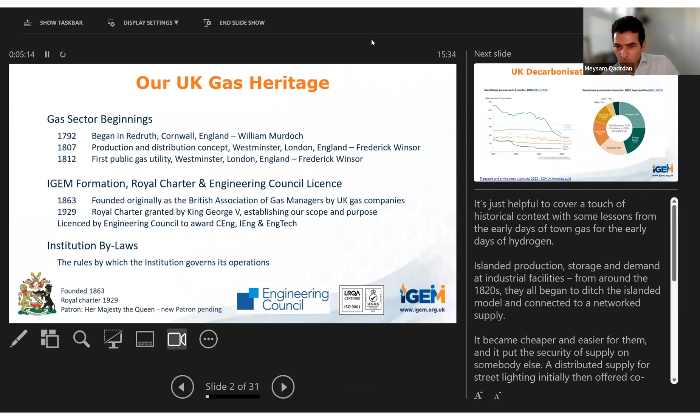Hopefully the slides will transition. There we go, excellent. I can see your notes. Oh, can you really? Do excuse me, I don't really need the notes, I can get rid of those somehow. Let me just try shutting my laptop. If you switch your screen, that should solve the problem. Let me reshare. I'm afraid that's the same. If you go up to the top there, it says display settings, click on that drop down, maybe presenter mode. It won't let me do either of those. Right, I've ended the slideshow, let me start again - that might be a bit more helpful. Try this. There we are, perfect, okay. Apologies - no, I don't really need the notes anyway.

So it's quite helpful to have a bit of UK gas heritage as an introduction, for some lessons learned from the past. In 1792, which is a long time ago, the gas industry kind of started in earnest, when gas was produced from coal to light a house and to provide gas for a torch and so on. That became something that Boulton and Watt offered to industry, to build gasworks sites for islanded production and supply for industrial facilities.

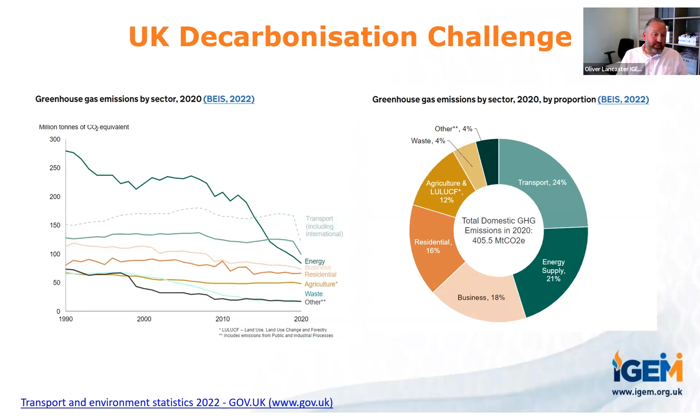One issue for the gas system is it just carries on quietly delivering and hasn't really had much of a front seat in the energy debate for quite a long time. It kind of only just woke up to it really in, say, 2014-15, when biomethane sites were starting to be connected, bringing renewable natural gas from wastes and residues.

Just helpful to go over a couple of points here, in that, as I mentioned before, it's old. It's been delivering for 211 years. In fact, I know an asset that's, I think, 201, 202 years old that's still operational. Around about a third of all energy consumption is for heat demand that's provided through this system.

Although it says there 80% of demand met by gas at peak times, it can be above that, towards 90%. And about 85% of UK homes are connected to the gas grid for their heating and use for cooking as well, so that's about 23 million in total.

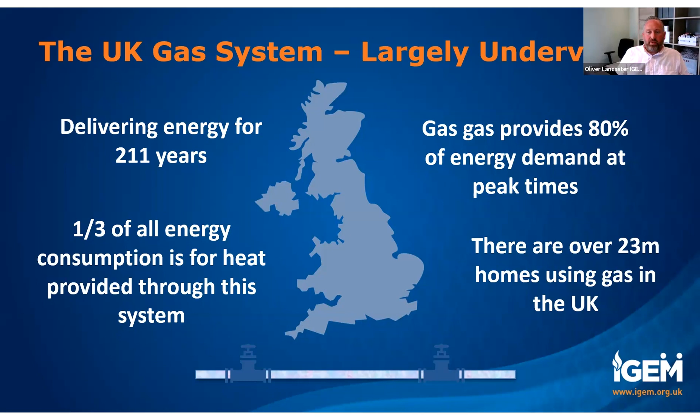There's a lot of pipe length involved all over the UK. And the government has been working on the options, the potential there is for displacing, repurposing the gas system so that it doesn't transport fossil gas anymore, but transports hydrogen instead, with different appliances that can be used to use that hydrogen if we don't use natural gas instead.

One thing that certainly goes overlooked is the storage capacity of the gas system. There's actually storage capacity in line pack. There might be some local storage, beach storage as well, but the inherent storage of the system that's relied upon includes the geological structures, anticlines, that the natural gas is coming from. That inherent storage is relied upon, and to replace all of that storage so it wasn't coming from gas at all is equivalent to about 21 billion Tesla Powerwalls, which is quite a substantial number, of course.

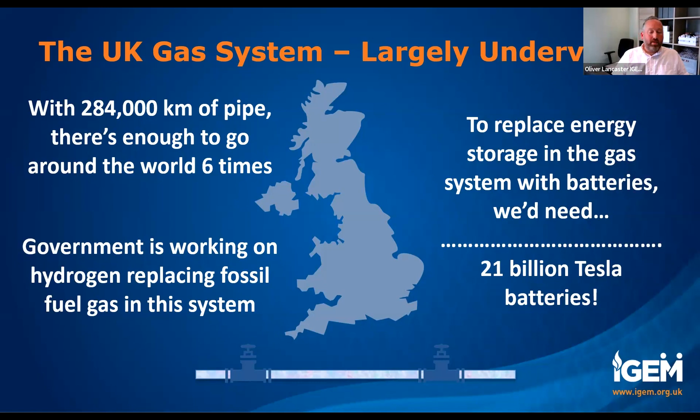But the storage capacity and the value of storage, and the low cost of that storage that we use all the time, is not really appreciated.

Part of the net zero energy system challenge, as far as I can pick up, is that there's a low awareness of system dynamics. That's not just across members of the public or people putting narrative and commentary out there in the media. There's actually, I think, across the whole group of people who work in the energy system, a low awareness of energy system dynamics. And part of all this problem is that there's a divided lobby on what we should do in the future.

There's deeply held opinion that maybe face saving, or a particular view that's been held for a long time. Or it could be that there's a business or investment connection to one part of it. Unfortunately, quite a lot of the time there are assumptions made about things people don't know, and there's maybe a blinkering and focus on just one small corner of the energy system that someone might be an expert in. I'm not saying I am by any stretch, but it's a huge system, it's very dynamic, and we need to overall get a better grip of it.

It's all around electricity generation, electricity consumption, and the networks that get it from A to B, and gas as well, powering industry - so all the industry producing products and employing people. It's fueling transport, and there's obviously some change going on with that at the moment, and it's heating buildings.

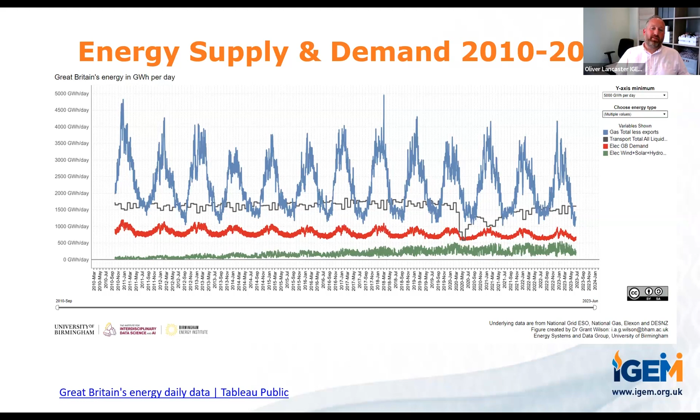Although the year-on-year amount of gas used in power generation in the UK has come down a little bit, the reliance on the gas system for power generation as a flexibility enabler of renewables has grown. At the moment, on a 5-minute by 5-minute basis, electricity from gas could be anything between 7% at its very lowest to keep the grid stable, right up to over 70% of electricity generation from gas. It's just working with the demand level and the availability of intermittent renewables at the time.

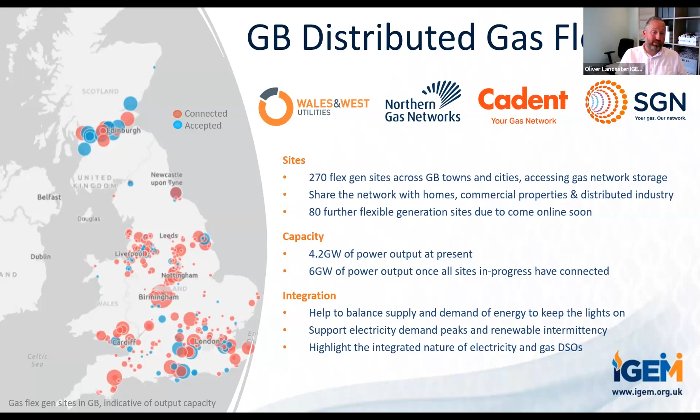That's power generation. When it comes to industry, there's a mixture of possibilities around electrification and fuel switching to things like hydrogen. This is an example of one particular industrial facility that will be using both of those.

This is a steelworks in Cardiff Docks in South Wales that doesn't make virgin steel, so it doesn't have the blast furnaces and coking plant that we have down the road in Port Talbot. This is recycled steel, so the steel comes in to be recycled, gets melted down with an electric arc furnace, and then there are currently natural gas mills for dealing with the recycled steel, turning it into base products. They're well on the way of planning the route to change over from natural gas to hydrogen, and we've actually partnered with them as IGEM on that for the safety skills and standards associated with the private network of hydrogen supplied to those uses.

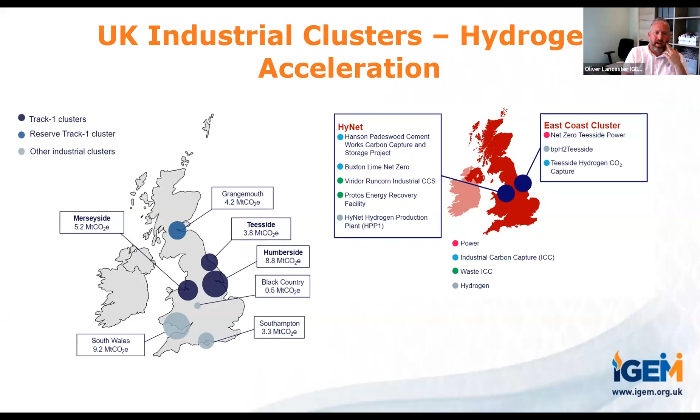This is an example of a cluster that's already got all these organizations waiting for a supply of low carbon hydrogen, largely blue hydrogen made from natural gas with CCS, but also green hydrogen supply in there as well. Importantly there's the connection of all the industrial clusters with transmission infrastructure, shown in the thick green line. This co-benefit is quite important - although it's only a small area of GB in those red areas around these major industrial clusters, there's over 40% of domestic heat connected to the gas networks and 40% of HGV registrations in those areas. So you can see a minimum viable product appearing here for pushing hydrogen into the economy.

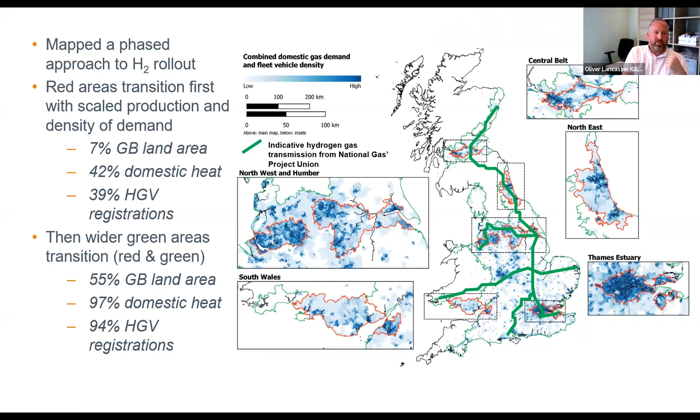Lots of work has gone into the conversion of cities. This is an example of Cardiff, done a few years ago, showing how it was segmented over 3 years and then sub-segmented, but lots more work will be happening on top of this. Just to give you an example of the detail at the local level of what's been going on.

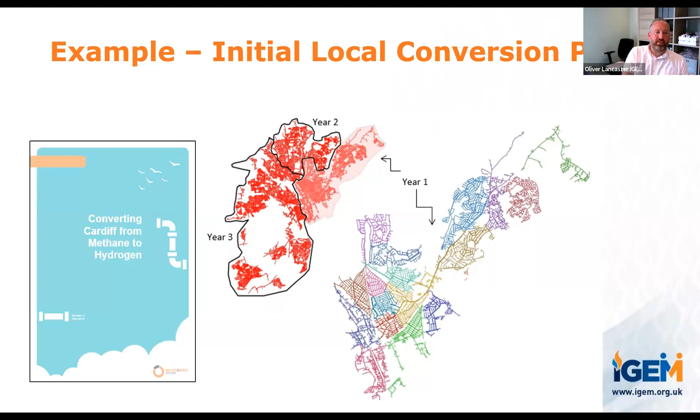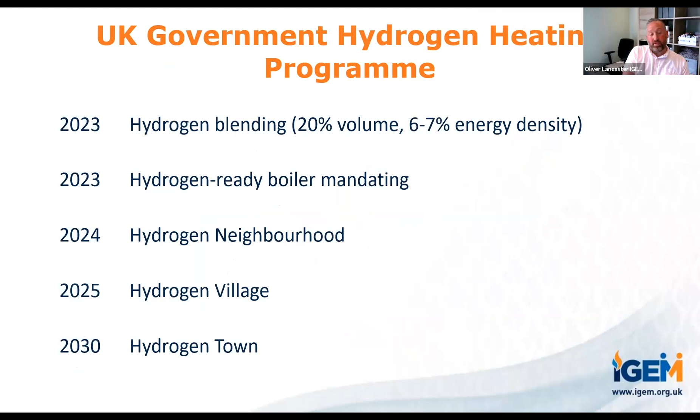Government have a lot of decisions to make - hydrogen blending and hydrogen-ready boilers being mandated, decisions to come by the end of this year. Then the delivery of the major trials: hydrogen neighbourhood, hydrogen village, and getting to a hydrogen town in 2030.

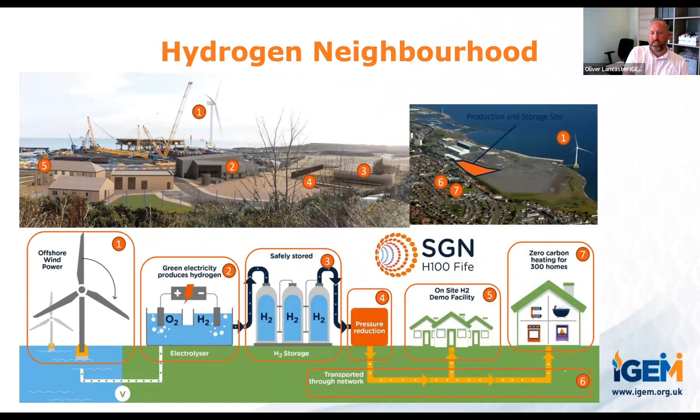The hydrogen neighbourhood is being built right now in Scotland, in Fife. This shows green hydrogen from offshore wind electrolysis through to 300 homes, and they're oversubscribed for that. That's showing the network being laid - I was there only a few weeks ago when the roads were having the new pipework laid, so people can choose to opt into the supply or stay on natural gas as this trial happens. It's testing the homes, not the repurposing of the network.

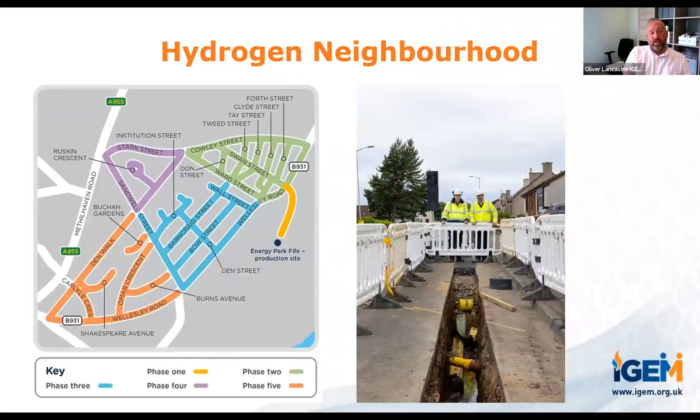The repurposing of the network is being tested in the village trial, and this is likely to be in Redcar in the north east of England. Many more homes, a leisure centre, a school - more complicated, but as I say, repurposing the existing infrastructure to help government make a decision on the future of the gas grid for hydrogen, targeted for 2026.

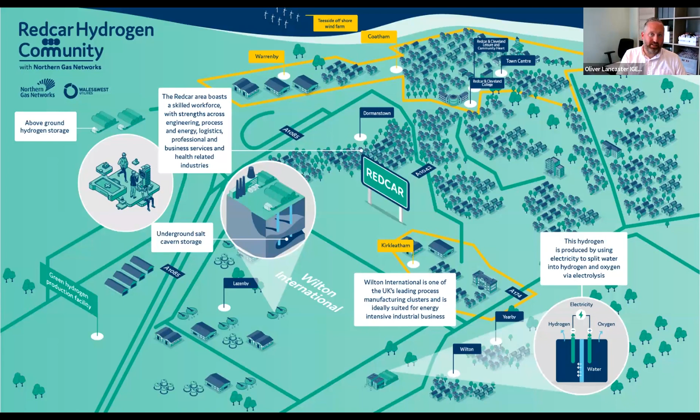We do have a hydrogen knowledge centre that our members have full access to, with loads of research and reports there that I'd be glad to help you get in touch with.

And I'm done. Sorry, a bit of a rush at the end. I'm really sorry I went over.

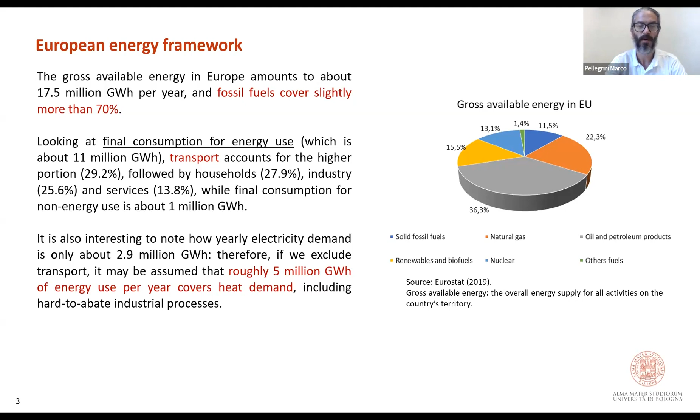What does it mean? It means that when we think about decarbonization, we don't have to concentrate only on power production and use, but also on heat demand and how we can substitute fossil fuels also from that side of the energy demand.

And if you look at numbers, in particular at industrial processes, we can see that there are a lot of processes - more or less half of the heat demand - that requires high temperature to be satisfied. And when I say high temperature, it means over 300, 400 Celsius degrees.

So the alternatives for fossil fuels, if we look at the market, are not so numerous. I mean electrification, heat pumps - that are more or less two faces of the same coin - and the use of biomass can be alternatives. But if we go to such temperatures, it's complicated to imagine solutions that are not related to the generation of synthetic fuels that come from renewables.

That's why I think it's very important to keep in mind that we have to deal also with heat, and in particular heat demand from industries. Because if we don't want to become... the deindustrialized region of the world, we have to think about how to deal with this concern.

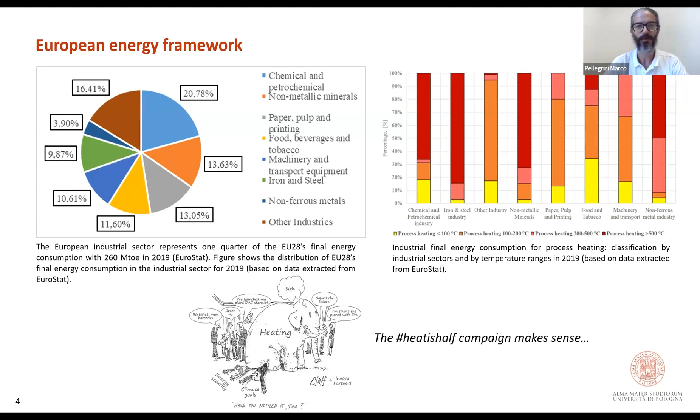What is the strategy at European level? When we talk about hydrogen, usually it is not considered that there is already a market for hydrogen. Hydrogen is currently produced in Europe and consumed not for energy purposes, but mainly in the chemical industries for plastic production, fertilizer production. And there is a demand that is not negligible.

6.5 million tons every year are produced and consumed in Europe. And almost 100% of this hydrogen is produced by, once again, fossil fuels, and in particular natural gas. The European Commission proposes to produce 10 million tons of renewable hydrogen by 2030, and also import the same amount from non-EU countries.

Yeah, it's a lot of hydrogen. If we look at the conversion factor with natural gas, these 20 million tons of renewable hydrogen could substitute 20% of European demand for natural gas. So it's a large amount of hydrogen to be produced and managed over the current hydrogen demand. So there could be a combination. Hydrogen could be produced to substitute the one that is used as feedstock for chemical processes, but can be used also as a substitute for fossil fuel for energy production.

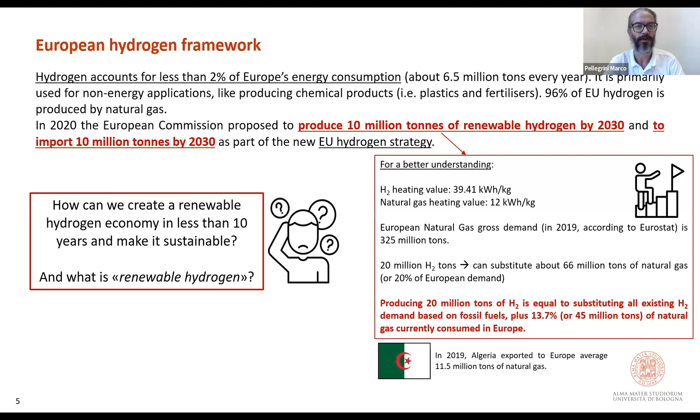This strategy has several actions. Basically, we can summarize them as: Europe is willing to support research and development, which is good. Being in a university, it's good. We have financial support for the transport sector and the hard to abate industries. So the strategy of the European Commission is clear. They want to address firstly the transport sector and hard to abate industries.

For sure, the European Commission and Union in general will set a lot of rules, because the European Union, as I usually say, loves rules, which could be good, but if the rules are not efficient, they can put some constraint on market development, and I will show you in the next slide what I'm talking about. And there is also a very large infrastructure planning for future application of hydrogen in all sectors. So the problem is where we can produce renewable hydrogen, and how we can transport it across Europe.

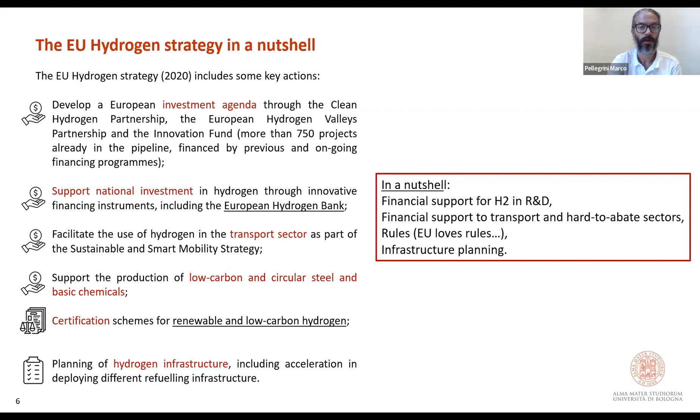And what are the first results of this hydrogen strategy? There are a lot of investments now on paper, and also approaching the ground in terms of real investment and plant realization. And if we look at this number, for example, we have this investment, 5.4 billion euros to be invested, supporting a national initiative in the European Union. And this is good, but this is just a water drop in the ocean, I would say.

Because if we look at the numbers that the European Commission gave us in terms of expected investment to reach the target they set, we are talking about 1,000 billion euros that are requested by 2030. And it's a large amount of money, and the European Commission does not have enough money to invest. So most of the investment is expected to come from private sectors, but there are a lot of open questions about CapEx, OpEx related to renewable hydrogen production. And it's still far from being a convincing market for a lot of investment, or at least this is my perception here in Italy.

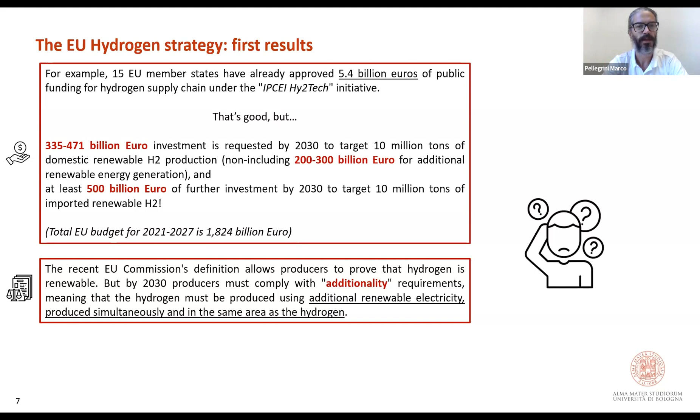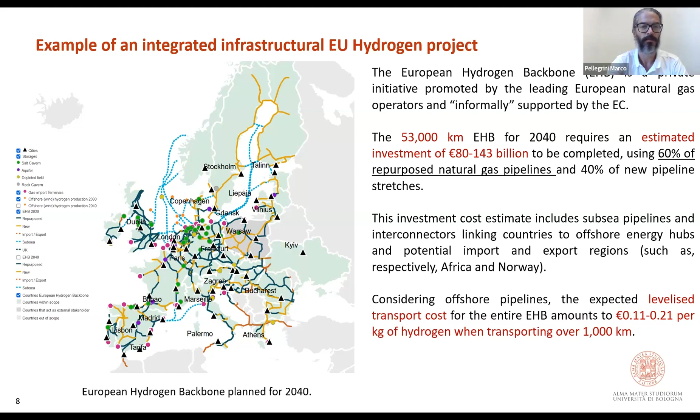If we move to Italy, the situation is quite similar, I would say, to the picture of the UK that Oliver gave us before, because we have a high dependency on natural gas that is also used for power production. So we have a lot of power production plants fed by natural gas, which was good for us to reduce our CO2 emissions, moving from coal and oil to natural gas. And we also increased efficiency, and increased flexibility, as Oliver showed.

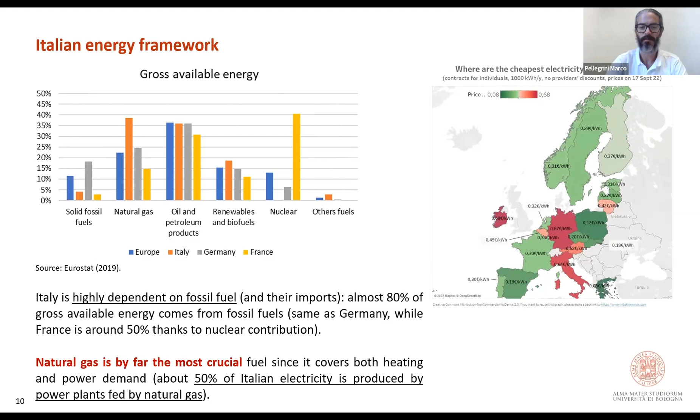But we are now, I would say, under this umbrella of natural gas, and this strong relation puts a lot of stress on the electricity price. If we look at this map in my slide, you can see that the effect of using natural gas can be penalizing for electricity production, because with a higher price of natural gas, you will have, in Italy in particular, a higher price for electricity generation.

And it seems like there is a kind of confusion now in Italy. We have this so-called preliminary guideline for the strategy development, so it is not a real strategy, but something that can give an idea. We would target a production of 0.7 million tons of renewable hydrogen in 2030, but it is not clear how we are going to use this renewable hydrogen.

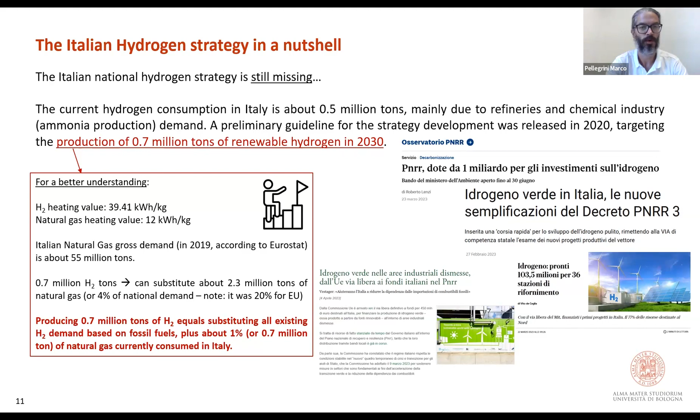As in Europe, we already have a demand for hydrogen for non-energy purposes. More or less, our preliminary strategy is focused mainly on the substitution of this fossil fuel-based hydrogen with renewable hydrogen. But at the same time, we already started some projects for hydrogen production for the transport sector. So it's a situation that is not so clear now in Italy in terms of general strategy, what the objectives are, and when we plan to use this renewable hydrogen.

So we are still waiting for a national plan. Anyway, in the meanwhile, there are a lot of projects growing because there are European funds and interest in the topic, and I will show two projects connected to the Ravenna area. Ravenna is a city in the central north part of Italy, close to the Adriatic Sea, with a port, an oil and gas cluster, and a connection with the highway.

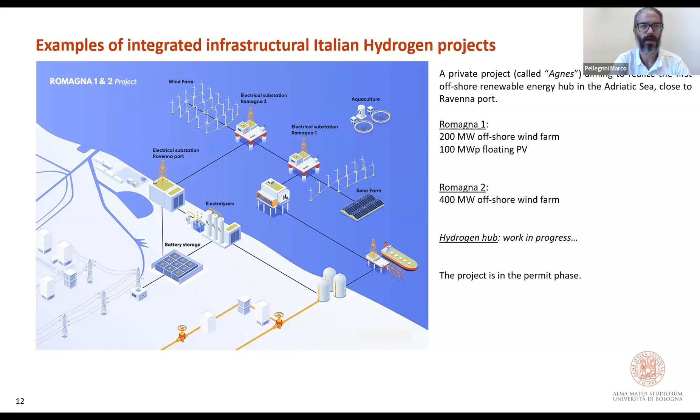It's still unclear if they want to do it offshore as well, or have the electrolyzers onshore, and how this can be managed. But we have these big projects on the pipeline, and another one in the same area, which is interesting to show.

It's interesting because there is a connection. One of the CO2 producers in the area is a steam methane reformer to produce hydrogen for non-energy purposes. It's used by the oil and gas and chemical industries that are in the Ravenna industrial cluster.

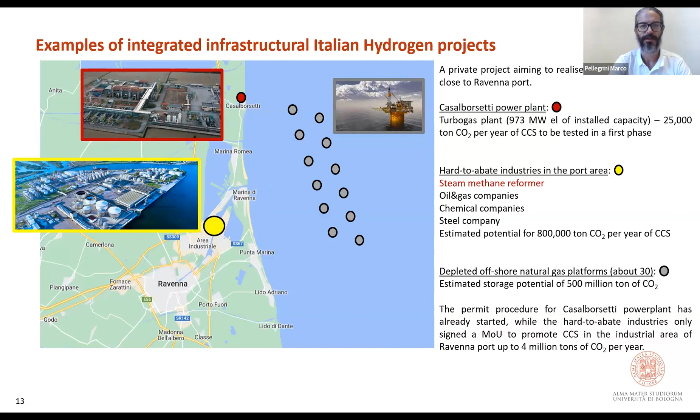So it's interesting because in this area we have different approaches to solve the same problem, and together with the companies and the local authorities, we are making some economic and environmental evaluation, because it's complicated to compare such different approaches and to decide what is the best choice.

So these are more or less the frameworks, and what are the challenges and opportunities from a university perspective in Italy. I will just give you a few words about that.

And when we talk about hydrogen, we have renewable hydrogen in particular. We have to start from a problem in terms of land availability or land consumption. This is something that sometimes is neglected.

So we are looking at efficiencies, at costs, water consumption, raw materials consumption, etc. But we forget about land.

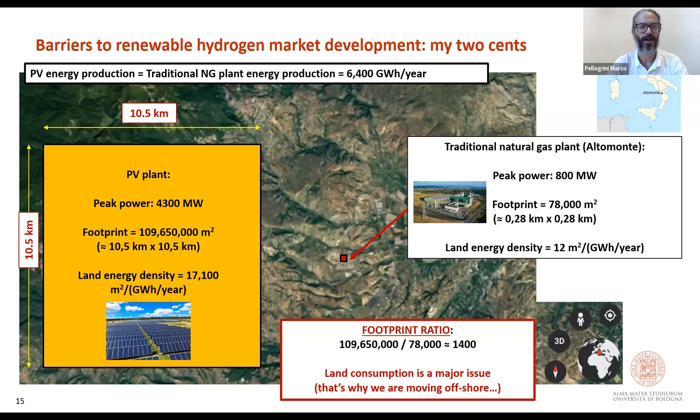But obviously, renewable power is not enough. We need storage across the value chain to produce hydrogen or to transport power to be used, for example, for electric mobility.

We need infrastructures, and there are efficiencies in transporting and in transforming energy across the value chain. It means that we need large storage capacity, and at the same time we need to improve the efficiencies that are still too low. So we have to work on the technological point of view and on the system.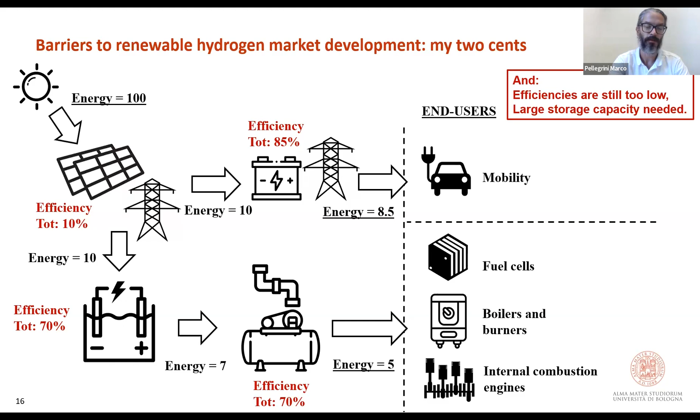And these are the challenges. And what is interesting for me, it's also talking about, and this is the last slide, what are the opportunities in the next years for companies, for research centers, for universities.

So there is still a lot of room for efficiency improvement in single equipment, but also in the overall system. And integration could be a good answer, especially at the beginning. So if we can create systems that together can increase their efficiency, it could be good also for renewable energy generation.

And obviously we need solutions to target this storage demand, and maybe underground hydrogen storage is something that we need to explore, because if we look at the bigger framework and not very small or specific applications, for sure we will need a lot of storage capacity.

This can be given by the existing natural gas infrastructure, yes, if we are talking about pipelines, but we need to explore also underground storage. We have a lot of natural gas that is stored underground also in Italy. And if we switch from natural gas to hydrogen, we have to take this problem into account.

But once again, it's a challenge. So we need to test, we need to prove that it is feasible, and what are the problems, and find technological solutions. Then we need to reduce the cost, for sure.

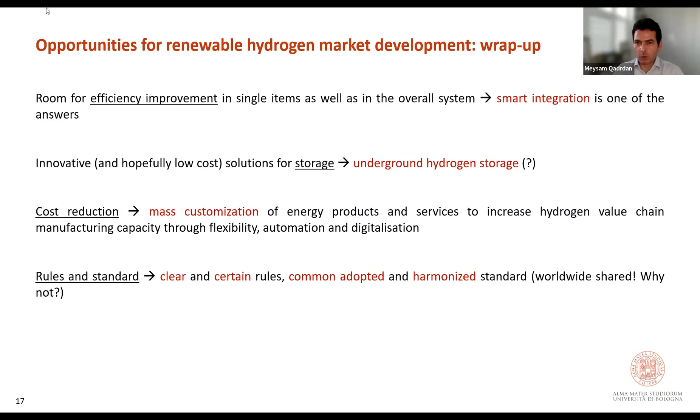Thank you very much, Marco. Very useful, very informative presentation, and yes, you were within the time limit, so brilliant.